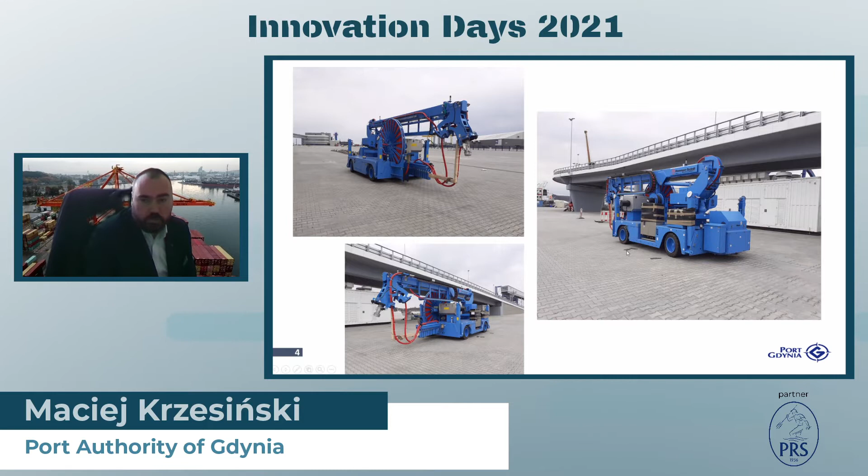It's some kind of truck, because our system is connected with the 2 points where the truck will be connected to the energy. And these are some pictures which show us that we have some connectors to the ship. And the second point is located here. It's a container with the main system of the onshore power supply.

Maybe one question: why we don't have a crane? We have a truck, because this terminal is prepared for many kinds of different vessels. I hope that we will host and serve different ferries here. That is why we have to be prepared for the different kinds and different places when we have to connect to the vessel and of course to the shore. That is why we decided on the truck, not the crane, as is usually used in the ports in western Europe.

The main parameters of this solution: frequency can be changed from 50 to 60 hertz. The maximum power of the connection is 3 megawatts. And voltage is 11 kilovolts. Sorry. These are the main parameters.

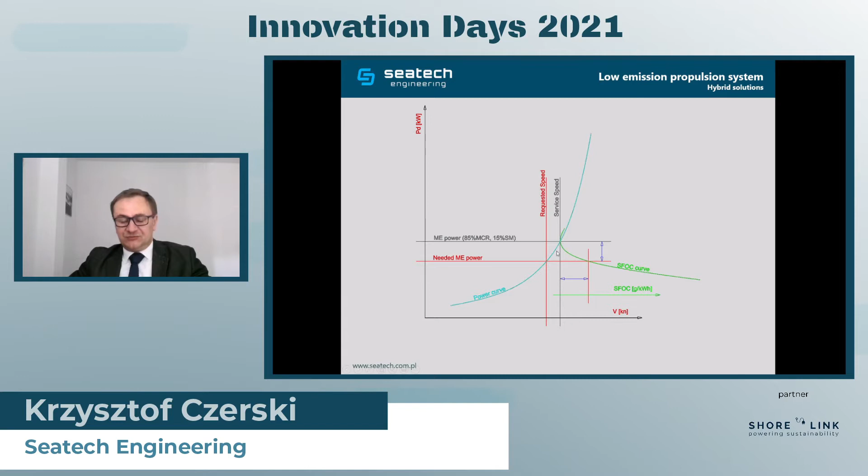What to do? The best way will be to operate this engine in this point. But what to do with the surplus of energy? So this solution is called hybrid. We can store this surplus of energy in the battery. And in case of so much energy, the power management system is deciding to store the energy in the batteries.

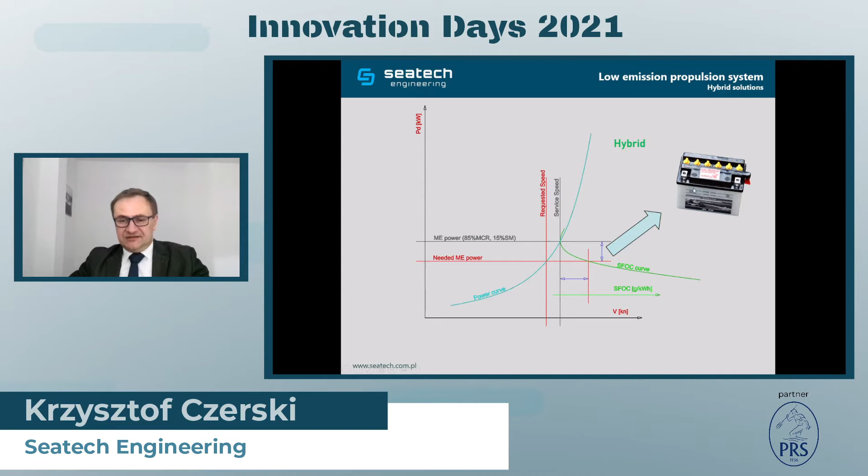So we call this system hybrid, and this hybrid system is mainly helping us with shaving the peaks of the load of the engine. So thanks to this, we are receiving a more or less average main engine power, which is flat, and all those peaks are transferred: we are loading batteries when we have so much power, or we are using the power from the battery if we have to add some power due to heavy wind or a rough sea or something like that.

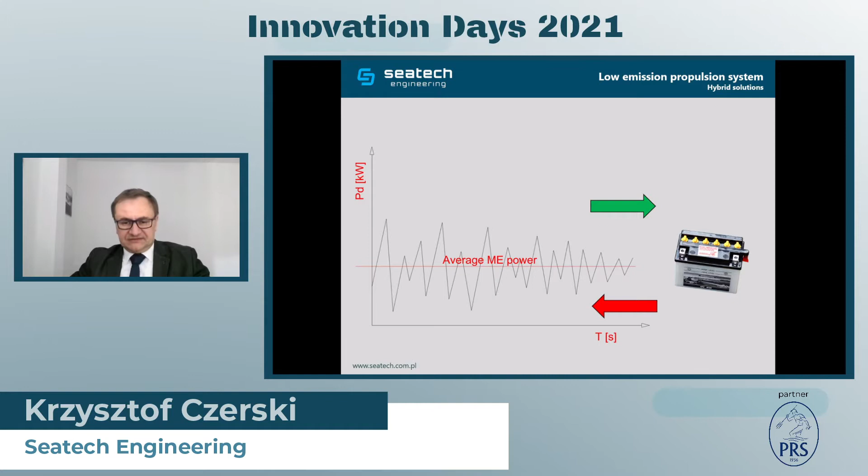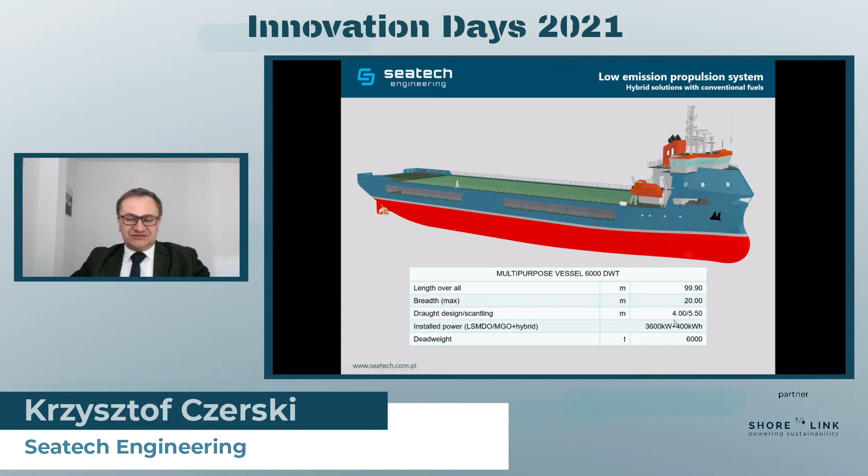The vessel is 100 meters long, and the installed power is 3600 kW plus 400 kWh installation in the batteries. This is quite a small amount, something like 10%, but it is giving us the possibility mainly to do this peak shaving. So this vessel is rather not designed for operation on the batteries only. The batteries will be used only for the peak shaving.

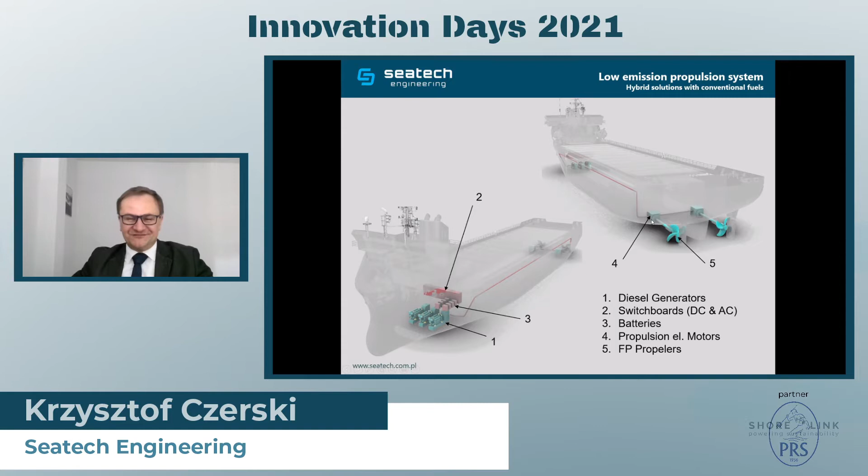Of course, here we should have the details like a thrust bearing, etc. But this is only for presentation purposes, because otherwise the picture will be blocked by the small details, and it will be impossible to see those main components.

the LNG dual fuel, let's say the double-ended ferry running on LNG, but also on batteries, which can serve from Elbląg to the 3 city harbors, meaning Gdynia, Gdańsk, and also to the Hel Peninsula. We suppose that Elbląg will be a good place because Elbląg is the shortest way on the express highway from Warsaw. And it will be a really great place to board the passengers,

and in the summer season to transport those passengers from Elbląg to Hel, because the distance on the sea road, with the speed of 20-24 knots, takes something like 2.5 hours, including some decreasing of the speed on the Vistula Lagoon. It will be more or less the same as if we go around the 3 city, Władysławowo, and all the harbors up to Hel.

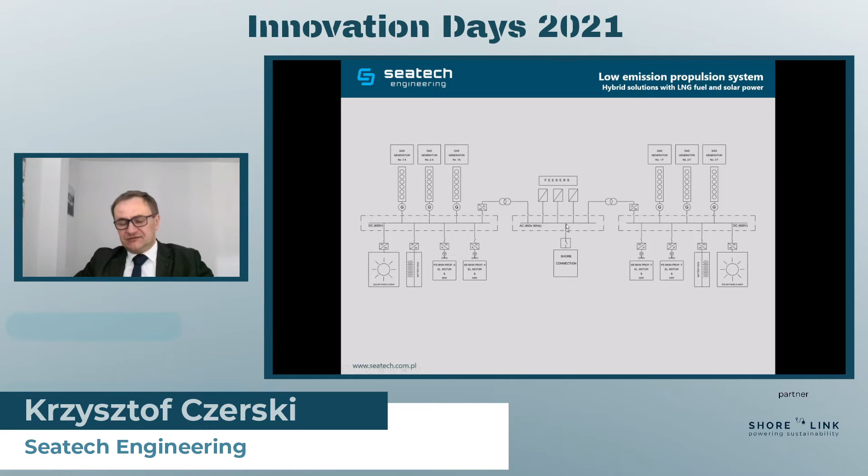We can have the shore connection to the DC grid, but because we don't want to rely on one harbor only, we would rather connect the shore connection to the AC grid. I'm really happy to hear what Mr. Koppelman presented about the solutions from ShoreLink. It is really a good proposal for our vessel.

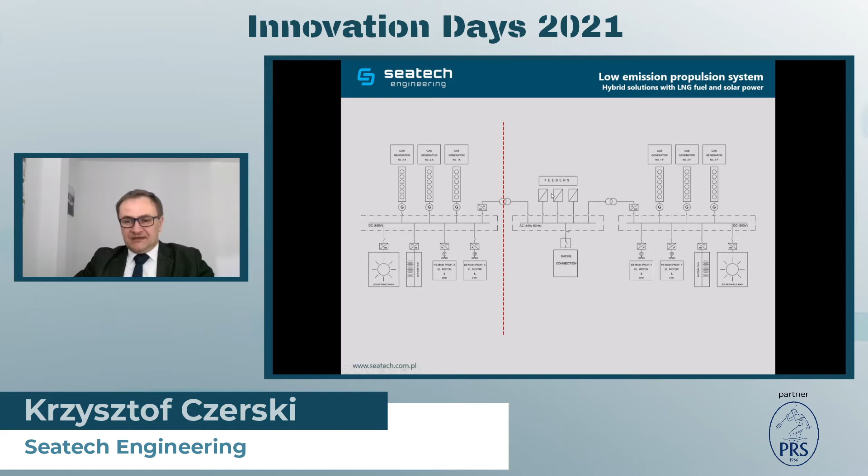And then we have the feeders, mainly in the accommodation area. And here we have this vessel, and this system looks like that. We have the LNG tanks with the regasification system.

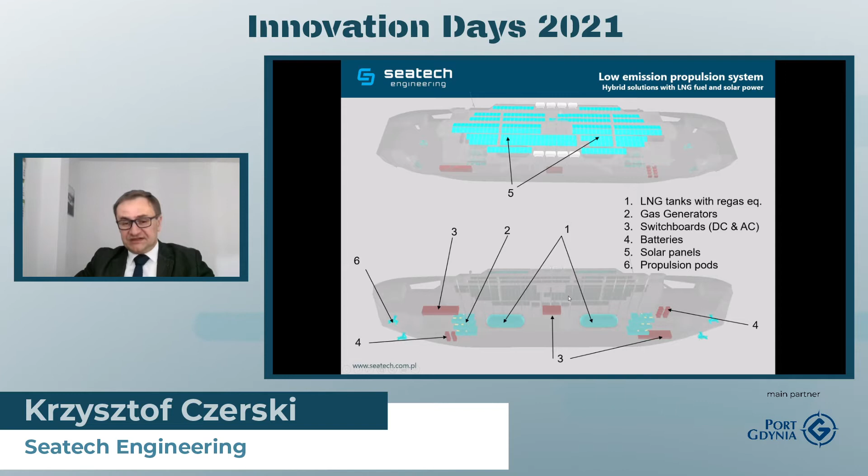We have the gas generators, we have the switchboards, batteries, solar panels on the roof, and we have the propulsion pods, 4 pods, which have the possibility to turn 360 degrees, so the vessel can have excellent maneuverability for crabbing, for turning, and for all operations in tight harbors like Elbląg Harbor.

So when we are designing this vessel, we are also thinking about the future, because the hull will probably be okay after 20-30 years. But we still don't know what the future brings. I don't know if the Motus Foundation will invite me for the Innovation Days 2031 or 2035. So maybe we will have a clearer view about the future.

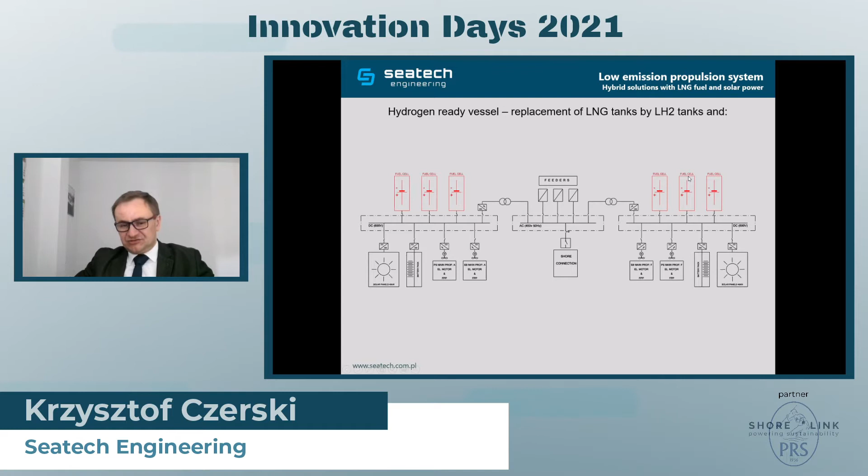However, for the time being, this vessel is designed so that we can very easily replace the LNG tanks with liquid hydrogen tanks, and the engines we can replace with fuel cells. And then we receive a vessel which is totally zero emission, running only on hydrogen.

And this preparation for hydrogen on the ferry gives me the possibility to also present to you our newest hydrogen-operated vessel, which is the wind farm crew transfer vessel, which we designed especially for our planned Polish offshore wind farms. I suppose that sooner or later somebody will start not only to talk, but also to do the real job on these wind farms.

And this is the hydrogen vessel which can transfer the servicemen from the harbors to the windmills to do the service, the maintenance and everything. The vessel is quite small, but quite powerful. It is 1,250 kW plus 280 kWh on the batteries. The vessel has 4 crew members with 4 berths and also 12 seats for passengers. Eventually it can be changed to 2 crew members with 2 berths and 24 seats for passengers.

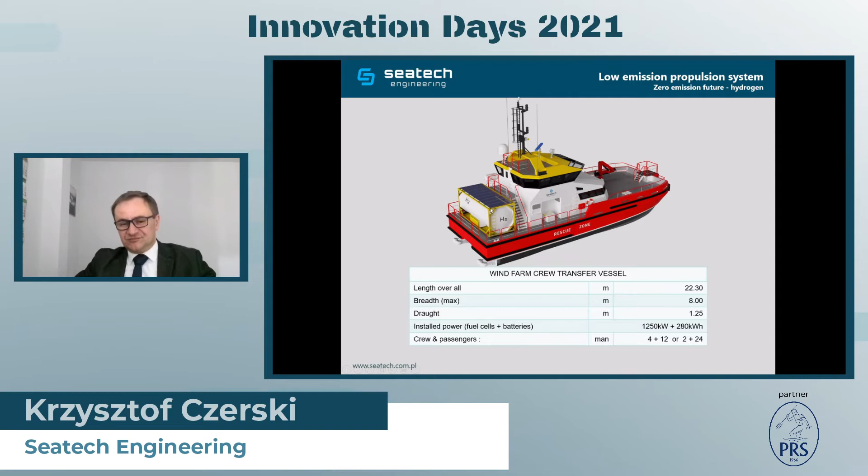The vessel is a catamaran, and in each hull we have this DC grid with the fuel cells. The hydrogen is transferred from the tank, which is installed on the open deck, right here, and the bunkering of the vessel is done by replacing this container. Additionally, on the top of the container, we have excellent space for small solar panels. So we can even have a surplus from the solar on this vessel as well.

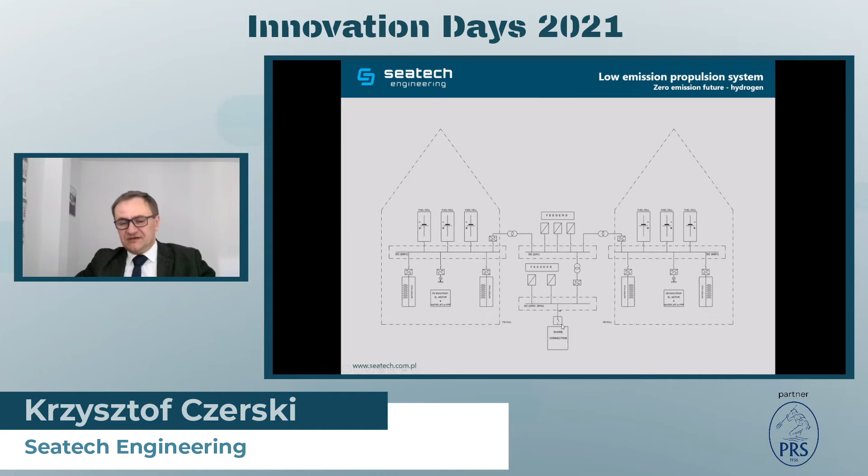So we have the DC grid, again, batteries, propulsion motor. It can be jet or it can be conventional propulsion. Then we have the frequency converter to the DC. We have the transformer to the DC grid, because on small boats, usually all equipment is running on low voltage, 24 volts, radio navigation equipment, some small pumps, because everything is small on this vessel. And then eventually we can have the frequency converter and a small AC grid for the shore connection, and also for small feeders in the accommodation area for the kitchen, or for charging mobile phones, computers, etc.

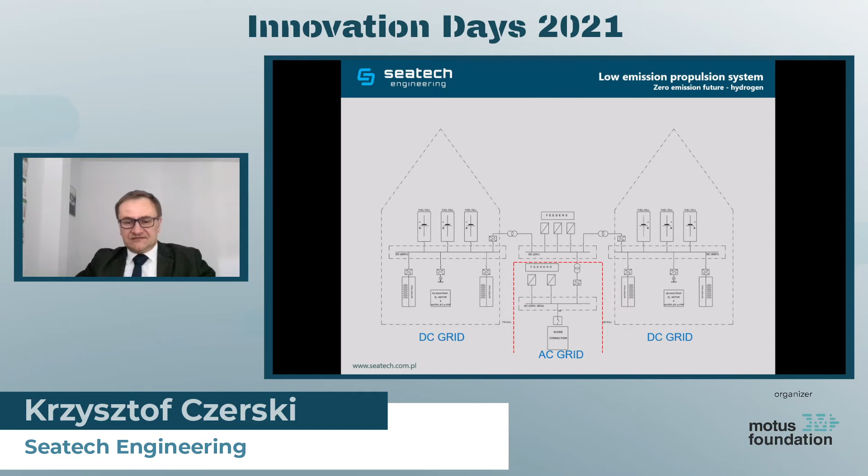And again, how it looks on the real vessel: we have the H2 tank. For the time being we are based on compressed hydrogen technology, but I rather support the idea of liquid hydrogen at low temperature, -250, because my background is from the LNG department. So I'm always saying that whatever we learn on LNG, we can use this cryogenic knowledge on liquid hydrogen. So I suppose that sooner or later it can be replaced by liquid hydrogen with a small cold box for the regasification of the liquid hydrogen.

But for the time being, we have this compressed hydrogen, and we have the hydrogen lines which are supplying the fuel cells. And then we have the switchboards, batteries, and the propulsors, which can be jets or fixed propellers with conventional rudders.

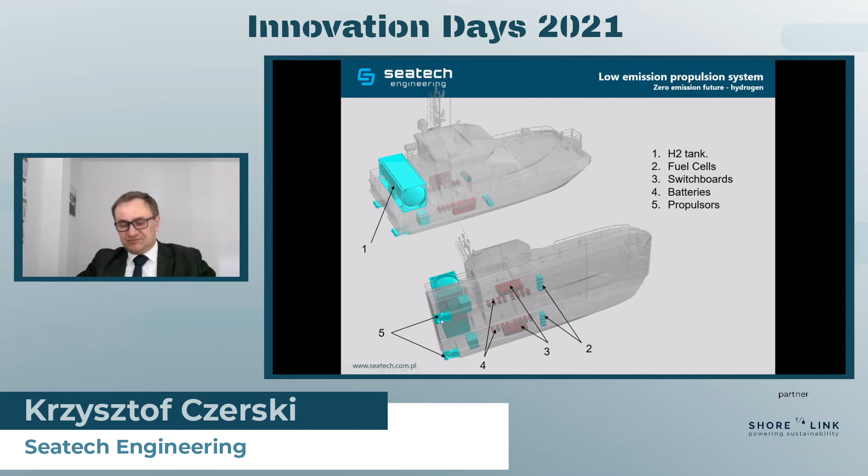Yes, and a small summary in comparison: we can say that conventional diesel mechanical propulsion is something like 100% of the CO2 emission, because I'm focusing on CO2 emissions. We of course have SOx emissions, but now due to the new IMO rules, we have a 0.5 level globally and 0.1 here in the Baltic Sea and the coastline of the US. Then we have NOx, which is limited by Tier 3, which is now quite low, and all vessels have the SCR, selective catalytic reduction. So let's consider only CO2 emissions. So a conventional vessel will have 100% of the emission.

Then for this conventional fuel, but when we will use the low sulfur fuel, forget about the scrubbers, because the scrubbers are not killing the emissions. They are only transferring the emissions from the air to the sea or to some chemicals which we should export from the world. But however, compared with this low sulfur fuel, we have something about 15% of the reduction. But of course, everything depends on the operation profile of the vessel.

And then we have our LNG ferry with this hybrid LNG propulsion system plus solar plus shore power. Then we are assuming that the operation in the harbors in Elbląg, Tri-City, or in Hel can be done on the batteries only. The transfer through the Elbląg River, the Vistula Lagoon and Vistula Channel will be done on the batteries, and we will use only the engines on the open sea. And then we suppose that we can run something like 50% of the time on the batteries, 50% of the time on the LNG.

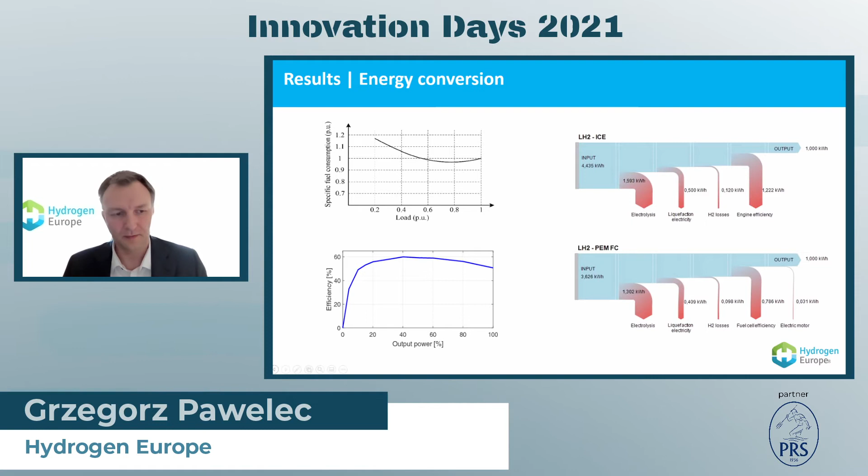And then when you combine all those aspects together, what you can see is that there is, let's say, a dynamic development there: when you go from the less energy dense options to the more energy dense options, the cost of the fuel always increases along that line. But obviously, as the energy density also increases, the impact on the storage costs decreases along the same line. So there is always this kind of trade-off that works differently for various ship types.

And we have done this analysis for over 60 different ship types, and here you can see the results. And the results are that indeed, there is place for hydrogen in the maritime sector. And what we did see is that for those short sea applications, where you can refuel often, even for some larger ships like ferries, and you can see this with the recently announced DFDS ferry between Oslo and Copenhagen, which is planned to run on compressed hydrogen, even for large ships this can work if you can refuel them very often.

Then for the deep sea shipping applications, it's always synthetic fuels that prevail and are the most cost optimal option. And out of those synthetic fuels, as I mentioned, it's always ammonia that comes out on top. So for no ship type did we find that the more complex options like liquefied hydrogen, liquefied methane, so liquefied natural gas, synthetic methanol, synthetic diesel would be the optimal option.

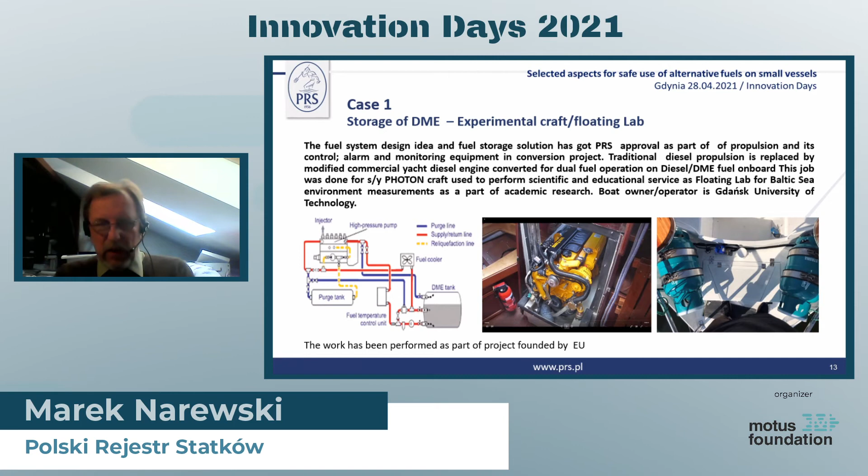DME properties are very similar to LPG. So because this is a kind of experimental craft, 2 LPG tanks are fitted in the rear part of the yacht. We did certification of this boat, and its primary use is for research. But it shows that there is potential in Poland, in particular in Gdańsk, to consider something which is experimental and could have a positive effect on possible practical applications.

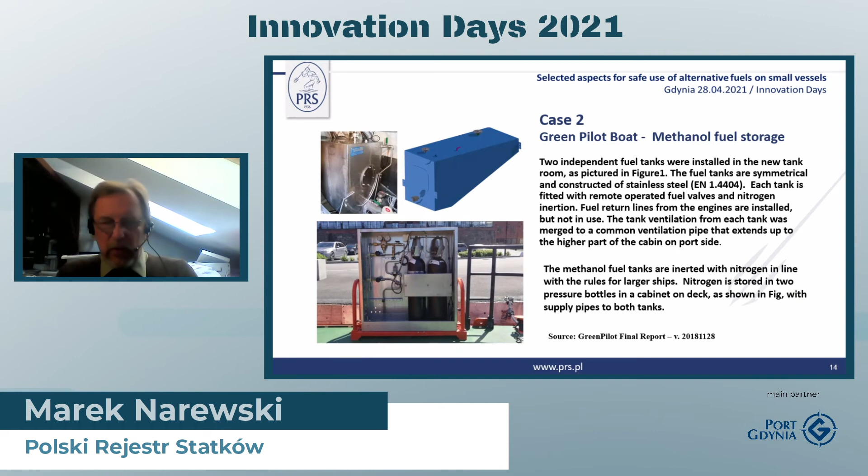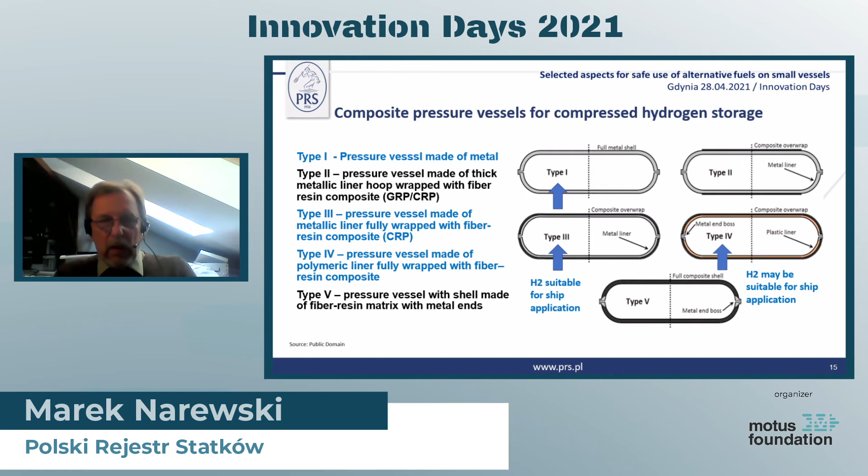You can use a type 4 cylinder, which is of quite similar design to type 3, but the liner inside is made of plastic. In the type 3 cylinder, the liner is made of metal. So it's much better for protection against hydrogen embrittlement and permeation, which could be a problem. This is a safe place for hydrogen, but some guidance could be taken in case of other low flash point fuels. As was talked about earlier, placement of hydrogen cylinders on a pusher.

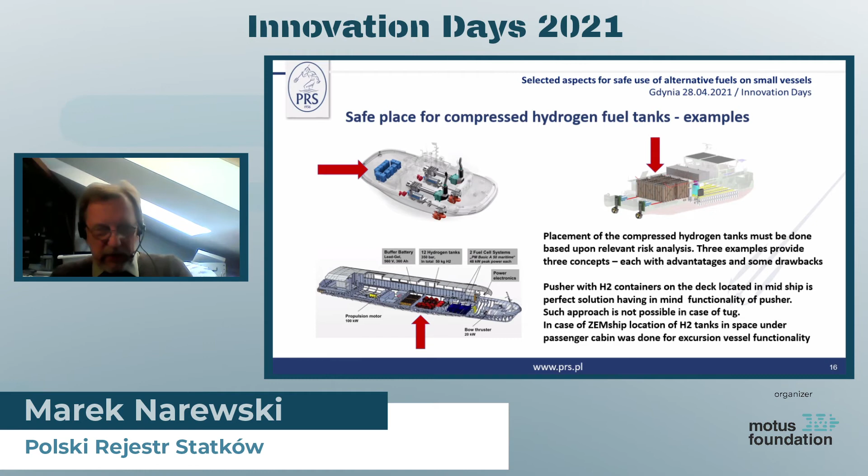In case of this vessel, which was one of the first vessels successfully completed and operated with fuel cells in Hamburg for a couple of years, hydrogen cylinders were stored in the bottom part of the vessel. What is interesting is that the vessel suffered a fire some years ago. The fire was quite disastrous and all the infrastructure was destroyed, but nothing happened to the cylinders. So it's one of the cases I'm familiar with showing that fuel cells and hydrogen could be quite resistant to potential problems.

As conclusions, what I would like to point out is that in case of alternative fuels, we have a different situation. We have to put more attention on design. Design could be more complex. It's not the same situation as we have with traditional fuels. Diesel engines have been used on board ships for over 100 years. And right now, the statistics show that every year about 30% of accidents on board ships are fires. What it will be with alternative fuels, I do not know, of course. But identification of potential problems is a prime task for the designer.

Identification of problems with insufficient propulsion at an early stage of design is another issue, because if we consider electrical power as an alternative fuel, someone who is the future owner of the ship is interested in having the lowest price. So it could be stressed. A designer could be under stress to select lower power.

But we did a study on this issue, and especially in some of the smaller inland crafts, it happened quite often that propulsion power was too small to cope with environmental issues, because in case of battery, we have limited capacity. In case of construction, the underwater part is small, the upper part is bigger. So if the power installed for propulsion is too small, the ship could not be able to fight with the wind and with the waves. So it could influence the final certification of the vessel, because the allowed operational area could be drastically shortened.

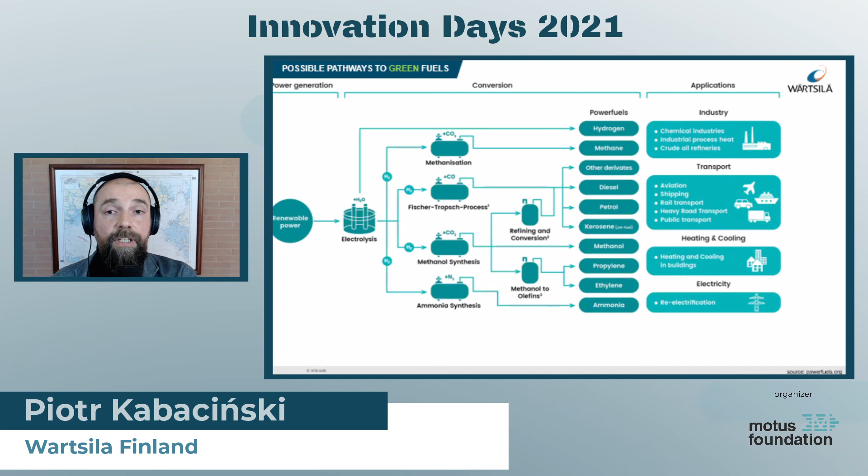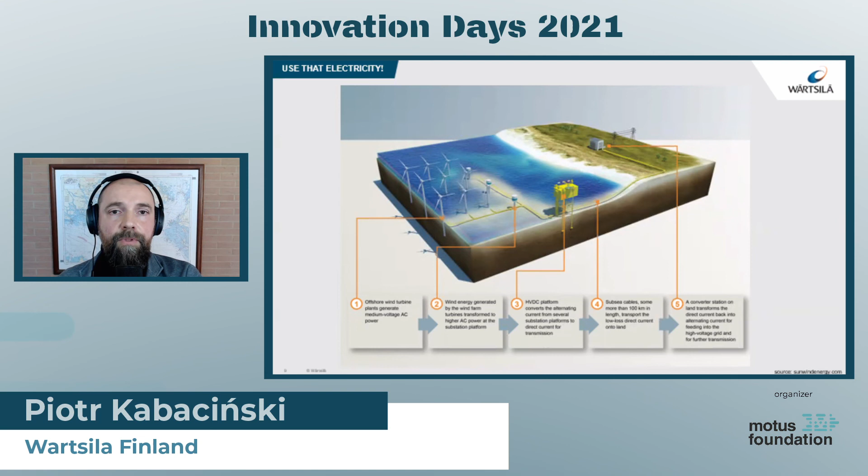If we already can produce green electricity, then we shall send it straight to the existing grid. It is a no-brainer. This is the most efficient way because no energy conversion means the least possible losses. Sometimes, however, it is not possible to get connected to the grid. Either it's too far away or there is too big a supply of green energy compared to the existing capacity. Here is one example.

As it was mentioned already, hydrogen plays the essential role as an energy carrier. But this hydrogen must be produced from renewables. Today, however, hydrogen is extracted from fossil fuels in a pollution-heavy process. Green hydrogen does not exist today.

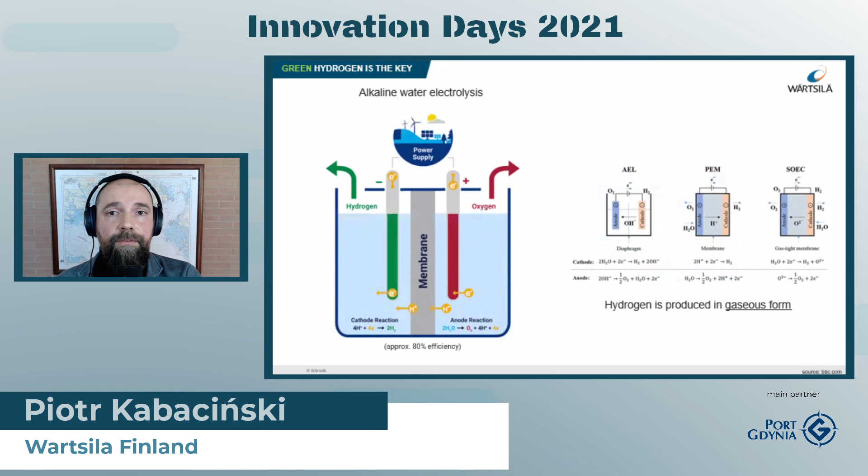Let's talk about the power fuels now, and allow me to introduce the 4 candidates for the Fuel of the Future award. We discussed hydrogen already, but this time we will consider it as fuel. Hydrogen has very high energy density. 1 kilogram of hydrogen has almost 3 times bigger energy content than gasoline. The problem is that this 1 kilogram of hydrogen takes 11 cubic meters of volume. Therefore, we must either compress the hydrogen at 700 bars or liquefy it at minus 253. And quite frankly, today it is hard to imagine such conditions on board any vessel.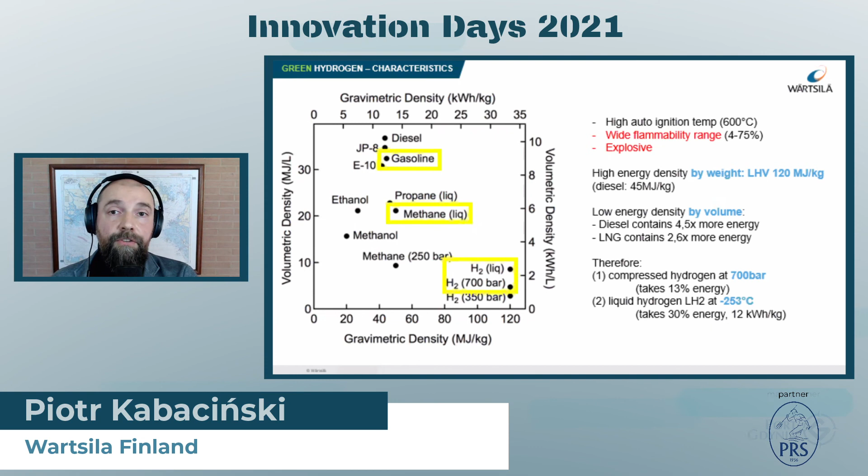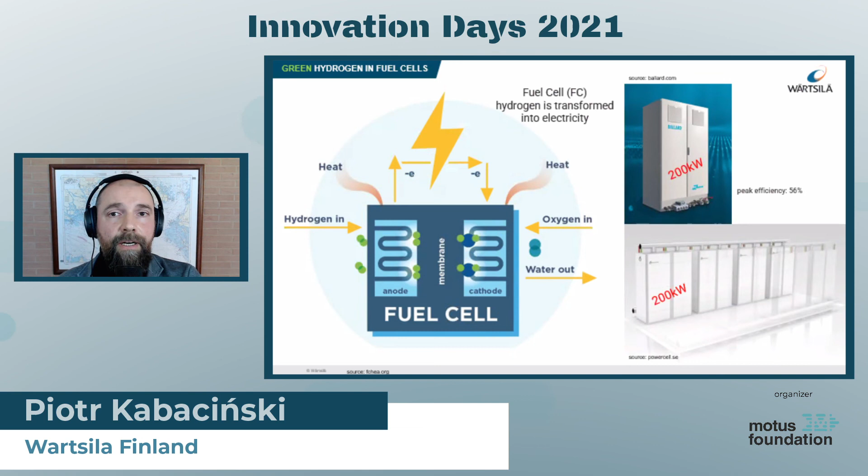Now, how to use that hydrogen for electricity production? This can be done inside the fuel cell unit. It is a reverse process to electrolysis. There are already a few suppliers offering fuel cells even to the marine market. But I will say no more about this technology.

Why? Because I am Wärtsilä and my heart is beating in accordance with the four-stroke cycle. Wärtsilä dual fuel technology is already capable of burning hydrogen as fuel. We mix up to 25% of hydrogen with natural gas, and we do have the ambition to create a pure hydrogen engine. Moreover, we already know how to handle the cryogenic LNG at -160.

Therefore, it will be easy for us to adapt to liquid hydrogen when the time comes.

The next candidate is ammonia, green ammonia. During my research, I found an important quote that ammonia was a detonator of population explosion. For over 100 years, ammonia has been the main feedstock to make fertilizers. Thanks to ammonia, we are capable of growing more crops, feeding more people.

Ammonia is easier to store than hydrogen. We need only -33 degrees to make ammonia as liquid. But green ammonia does not exist today, same as there is no green hydrogen to make it from. To produce ammonia, we need nitrogen, and nitrogen is not a reactive compound.

So in the Haber-Bosch process, we are forcing it to react with hydrogen. This requires high temperature, high pressure, and a catalyst. And apparently, there is no better way yet than the Haber-Bosch process.

And here again, the solution is the Wärtsilä dual fuel technology. We can either blend ammonia with natural gas before the engine, or we can mix ammonia with diesel inside the combustion chamber in a specific ratio. When needed, we can easily convert our standard LNGPac system to something like an ammonia Pac.

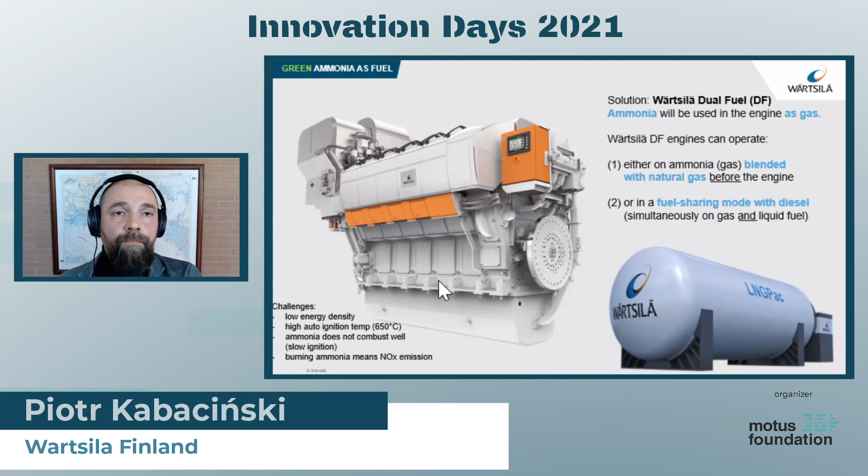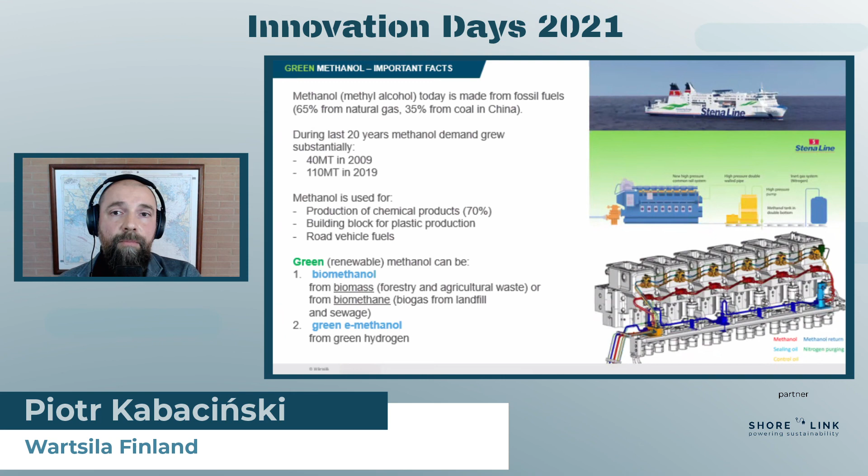As for renewable methanol, there are two types: biomethanol from biomass and e-methanol from green hydrogen and CO2. To produce green methanol, we need carbon dioxide, CO2, which has to be captured first before it's added to hydrogen during the synthesis process.

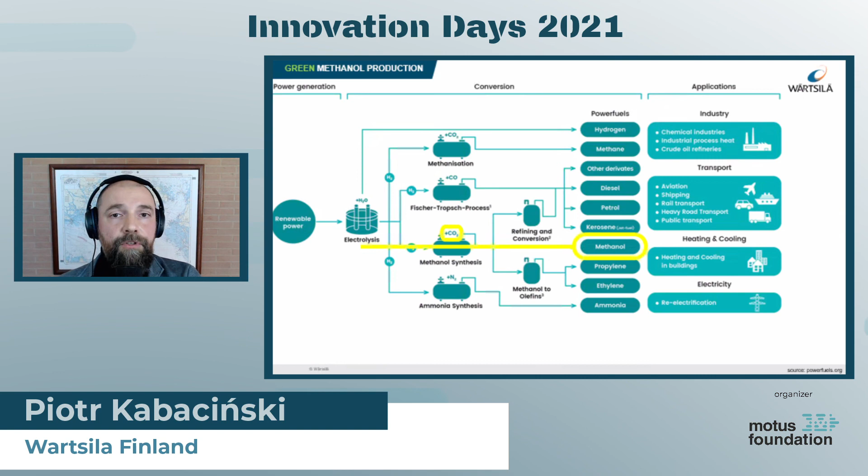Since 2015, we already have the valid reference of methanol as fuel on the Stena Germanica vessel, which was converted at Remontowa ship repair in Gdańsk. This technology can be transferred to all our portfolio engines.

The last candidate on my list is synthetic methane, which is basically the same molecule as methane. For the ship owners, it means business as usual. Something to keep in mind is that burning synthetic methane in the engine is still related to CO2 emissions, but the way the fuel is produced is carbon-free.

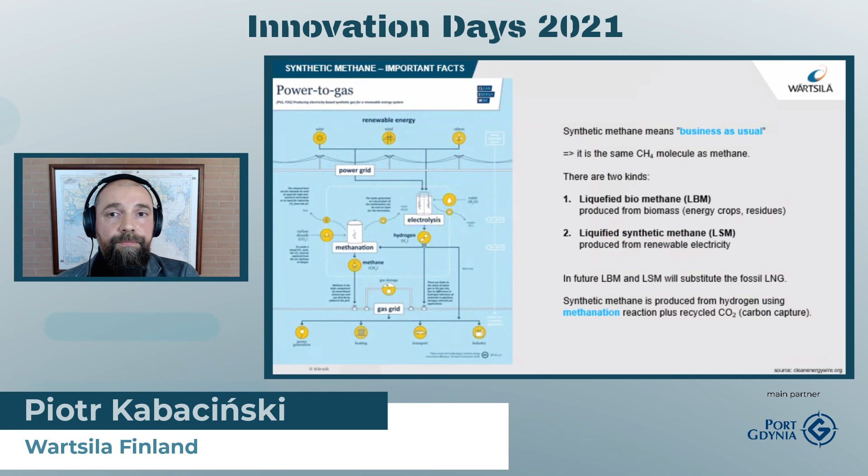Our dual fuel technology is already proven in burning natural gas. Using synthetic methane is the best gateway to carbon-free fuels, because today you just operate on natural gas. Tomorrow you will convert the system to carbon-free gas.

Now we can start summarizing. In principle, there are two possible strategies. The first is you do nothing and just wait for synthetic fuels to come. The second strategy is for those who want to become carbon-free as soon as possible. In principle, it means switching to fuel which doesn't include carbon, like hydrogen and ammonia.

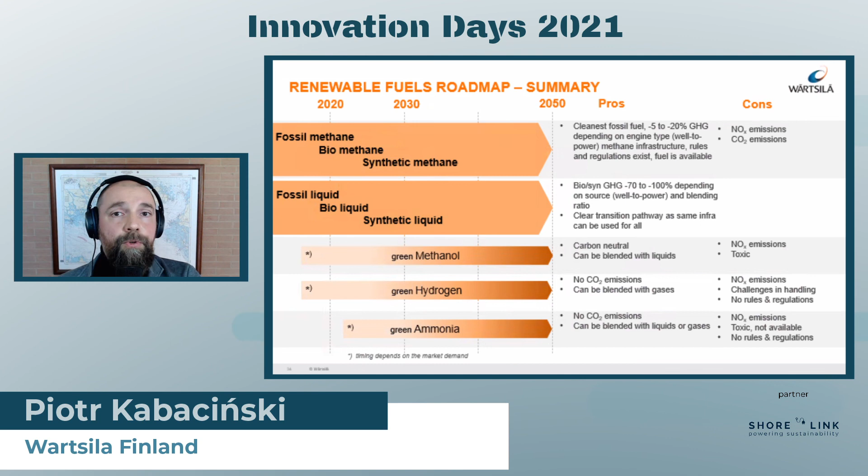At first, you can start blending carbon-free gas into natural gas. Then, when the technology is mature enough, you switch to pure ammonia or pure hydrogen.

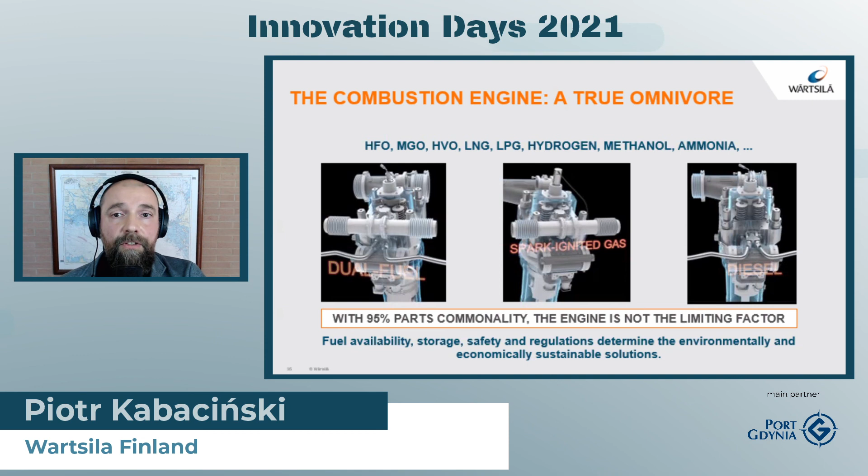The word omnivore means that the internal combustion engine basically can eat everything. In the transition to green fuels, the engine is not the limiting factor. The engine as such will stay almost the same. The only changes inside are about cylinder heads and piston crowns due to the different compression ratios. So if the engine is not a limiting factor, then what is the problem?

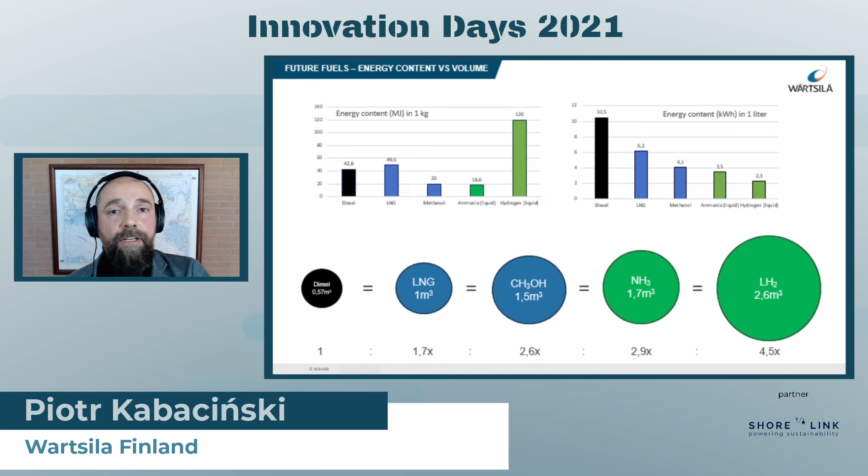The final word. Here is our recommendation about becoming future-proof. Go gas now, go gas today. According to the research recently published by Sphera, using LNG as fuel reduces CO2 emissions by 23% overall. And as was mentioned already, by installing dual fuel engines today, you are already making the first step towards carbon-free gases. So you will be able to use them whenever they come.